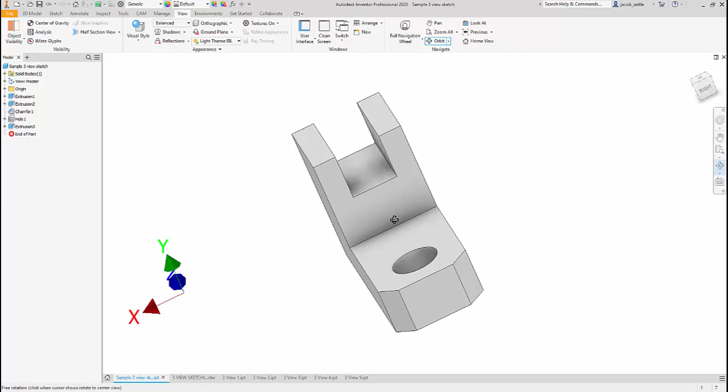I'm not worried about you drawing this to exact size. Just look at it proportionally and say, yeah, this is about maybe twice as tall as it is long. Just do your best on proportions when you do the sketch work as you go through. So just orbit around a little bit, take a look at that.

This is our front view, line it up long ways. You can see the view cube says front, and then you'll have a right view. And if I go back to front, you'll have a top view in that orientation. I'll be looking for this kind of view. So this is right in the computer, but you're going to hand sketch your front, top, and right view. This is not required, just to show you what you're working on. And you're going to put a couple labels on the part here.

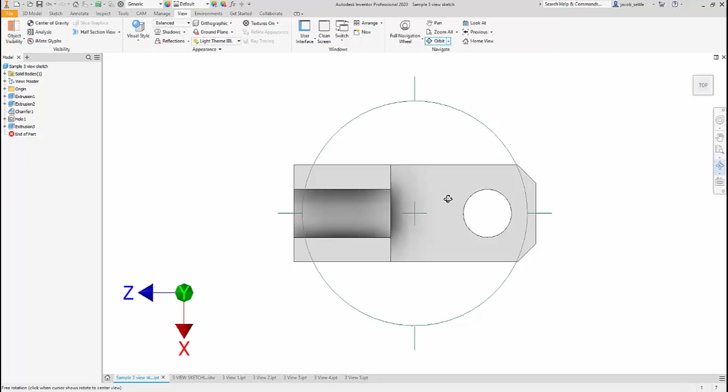For clarity, I am going to show you what the hidden lines and things would look like. So I'm going to take my visual style over to wireframe with hidden edges. This gives you an idea of where these hidden lines would be.

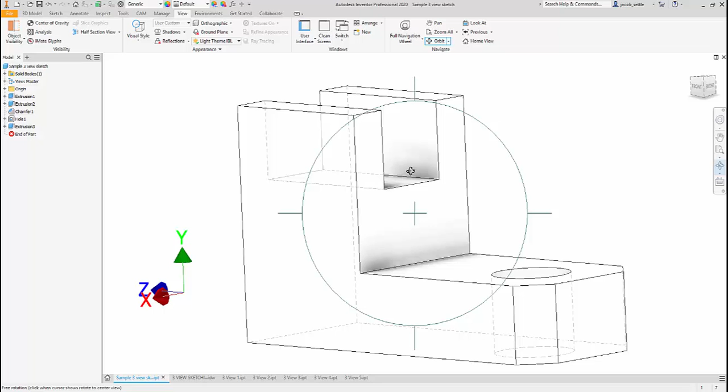If I look from the front, I'll have that hidden line where this little groove goes across the top. I see that hidden line. We have this hole going down from the top, so in the front view I'll see hidden lines on each side of that hole. This object line here comes from this little angle cut on the side.

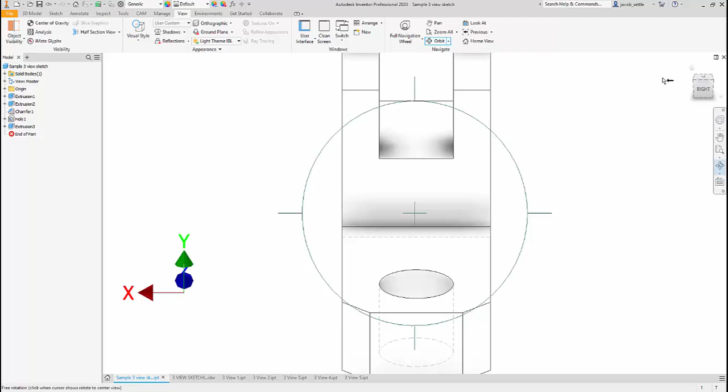I want to go over to the right view. The only hidden lines I have are the two that come from the hole, so on each side of the hole I'll have that, but everything else is object lines. And on this one, looking at it from the top, again all object lines, no hidden lines here. Just trying to make sure those things line up.

Now you're going to sketch this. You have the option, I have this for you to download. If you have a printer at home and you want to work on graph paper because it's easier, you can print this out. If you have regular graph paper at home, you can work on that. But if you don't, like I didn't have anything to work with, just a plain sheet of white paper, draw a little border around it.

Then do your best to draw what the front, top, and right view would look like. You notice my circle's a little bit lumpy here. That's okay, I know you don't have tools to work with. If you want to use a circle template, if you have a compass at home and you're a perfectionist, go ahead.

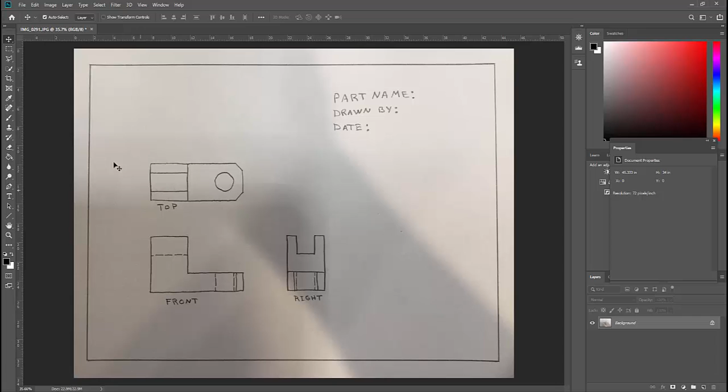All I'm expecting here is your best effort to sketch the front, top, and right view. Leave about the same space between the views. Don't start down in the corner, start a little bit up from the bottom corner. When you start your views, they should always be oriented with front starting here and then top directly on top of the front. If you remember, like we did stuff where these lines should kind of line up to one another, how wide the view is.

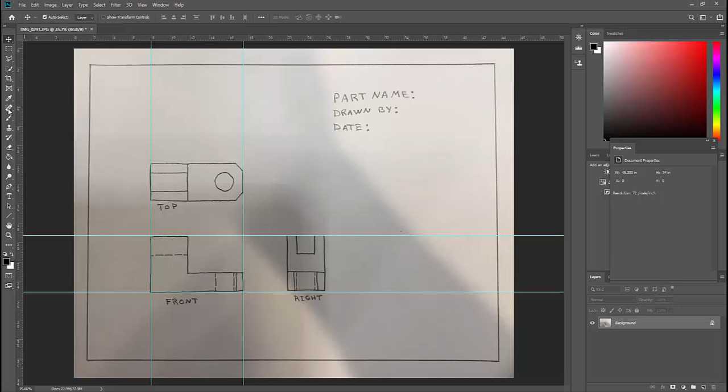If we look at how these views line up, you see my picture's a little bit crooked there, but the front view roughly lines up height-wise with the right view. Same thing, width lines up with the top view. If we look at this little feature here, that should line up at the top there. So do your best to do that.

Put your part name up there. For your first one, it's going to be 3 view number 1. Put your name by 'drawn by' and put the date that you do it.

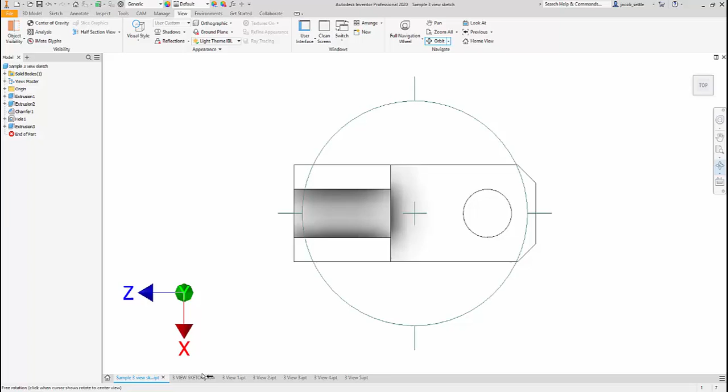We'll be posting one of these per day for you to do. The next day I'll post the completed assignment, so I'll post what you're getting from just an Inventor drawing, what this looks like, for your following drawing. Your first one you're going to do is this guy. Not terribly different than what we're doing here, but I'll go through that one separately in a separate video.

Again, what you're turning in is simply a hand-drawn sketch, and you're going to take a picture of it with your iPad and then upload it to Schoology when you finish.